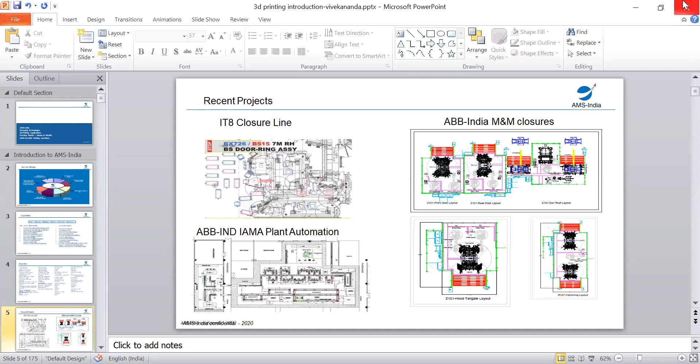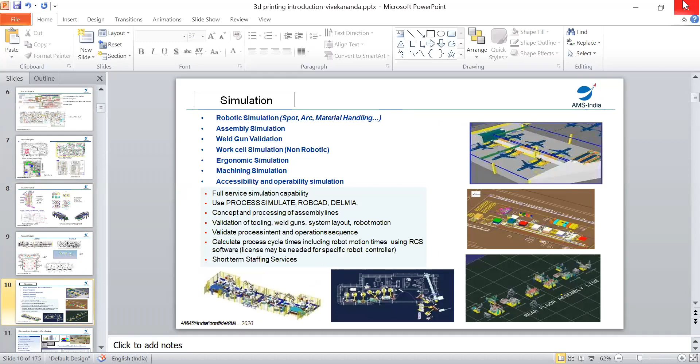I don't think these are all much relevant, but I'll move fast because I'd like to share more on 3D printing and applications of additive manufacturing. Some of the lines we design are for Renault, Daimler, Volkswagen, and almost all car manufacturers in the world. We also design the line, calling for making a whole process of how the line is made. We do a lot of robotic simulation, discrete event simulation, and check the whole line using simulation software. We ensure these factories will manufacture cars according to the cycle time and quality the customer expects, and only then does the actual manufacturing start.

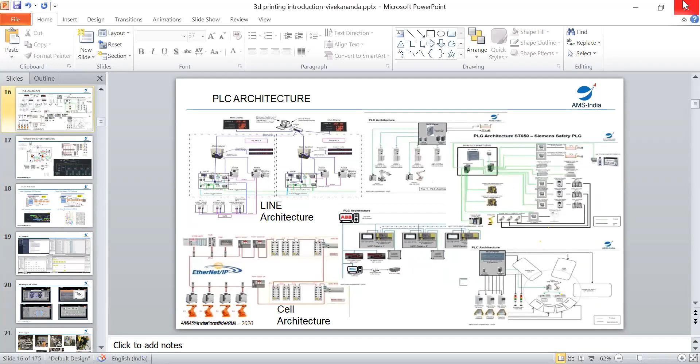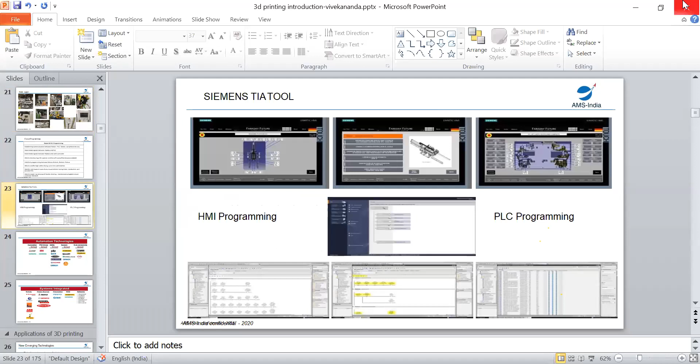These are some techniques by which we do it. We do controls engineering, design the PLC architectures, the complete line design, the cell architecture. We handle power distribution, safety zones, and how utilities are used in a factory. We design PLC programs for each station and do all the HMI screens for human machine interface, so the operators know how to work in the factory. We also give on-site support, do robot PLC programming, and use the complete Siemens TIA tool. We are primarily into automation technologies.

We work a lot with companies like Siemens, Mitsubishi, and Rockwell, doing automation, safety devices, sensors, I/O connectivity, etc. We integrate all these systems - different robots, PLCs, control systems, actuators, and sensors - all together in making a factory. This is what we have been doing for the last many decades.

But what happens normally in an industry of this kind is that business is not continuous throughout the year - it's a cyclic operation. There will not always be business; there are ups and downs. New cars don't keep coming always, it comes once in three years, so there's always a down period. And when there's a recession, the automotive segment gets very badly hit.

That is when we were struggling at one point in our organization to see what to do, and we started doing internal analysis to see how we could survive the recession. In 2010 we started thinking about new technologies, doing analysis on where we should go ahead and what should be the future direction of the company. We saw areas of robotics, smart manufacturing, artificial intelligence, IIoT, and 3D printing - these are emerging technologies. We went into more depth to find out why these technologies are coming up and why they would have a great impact in the future. We found that people want personalization - they want everything personal.

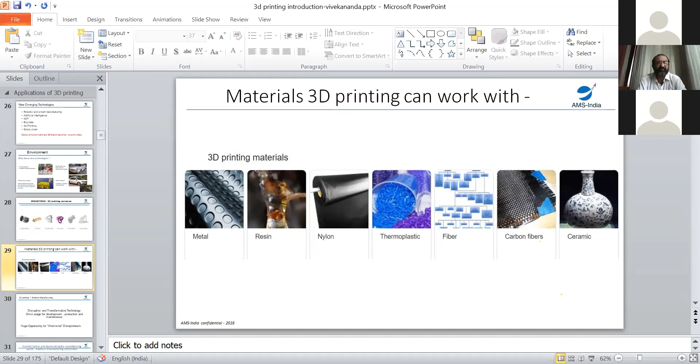So the same technology and the same machine was able to work with different materials, which was not commonly possible under conventional manufacturing technology. And that is why it became very disruptive in nature. It's a transformative technology, used for production and maintenance.

And this had a great opportunity for companies like ours, or any company for that matter, or anybody who wants to become an entrepreneur, to be in this domain, because this is going to be the future.

What we have also seen is this actually brought in a huge paradigm shift in thought process, where you can start designing without limits. We can start designing without thinking about circles and squares. Normally this is what we always have for manufacturing, because that's the conventional way, which calls for circles and squares—everything we normally tend to think like that.

But instead of doing subtractive manufacturing and removing metal out of a block, once you start thinking of adding it part by part, making a shape doesn't become difficult. So the more complicated the shape, the easier it is to 3D print than with subtractive manufacturing. So this actually gives a great advantage.

You can reduce the manufacturing time. You don't need tooling also. You can just directly start printing, just like how we do printing of any part for that matter.

For artists, however they want to think about it, complex geometry becomes an advantage. So traditional methods have to change, and this is what actually happened.

So what we also saw was, not only in traditional manufacturing, the whole methodology was: you have a 3D model, then you have 2D drawings, then you have dies, gauges, and then you start finishing the whole part. You make a whole line to produce these complicated parts. Then once we came to 3D printing technology, the whole thing started becoming different. You have a CAD model, you slice it, you directly 3D print it, and then take the part out and start finishing it. You don't need to think about dies, machinery, or the process of manufacturing. The whole thing is different.

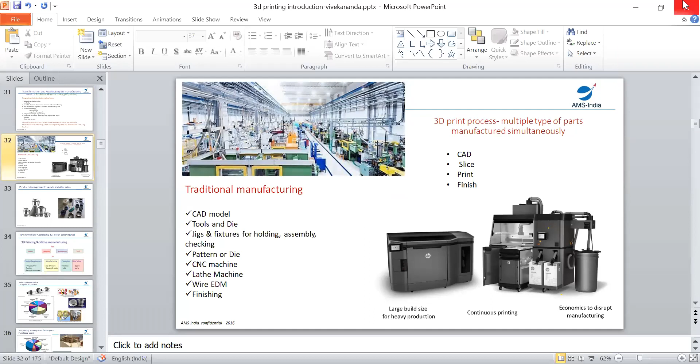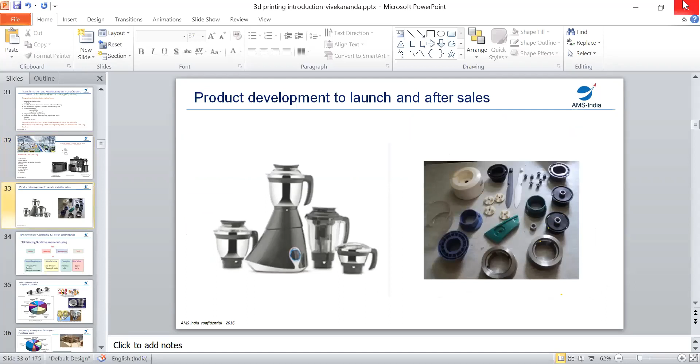This brings in a great advantage in the process of 3D printing itself, which brings a huge benefit for manufacturing technologies. For example, parts manufactured for launching and after-sales support can be directly printed. Every component you see on the screen is 3D printed. This makes a big benefit for us because there's a huge market available where things can be converted from conventional subtractive manufacturing towards additive manufacturing. This brings development time reductions, savings in product development, manufacturing costs, production, and prototyping. We save everywhere. Products can be launched much faster, and the process can be thought about much differently.

Till the product gets developed, one of the biggest challenges in the industry was to establish a good manufacturing process. But here we've found a way where we don't need to think about the process first. We first make the working product, useful to humankind, and then think about a process for manufacturing. This brought a huge transformation, a change in thinking itself.

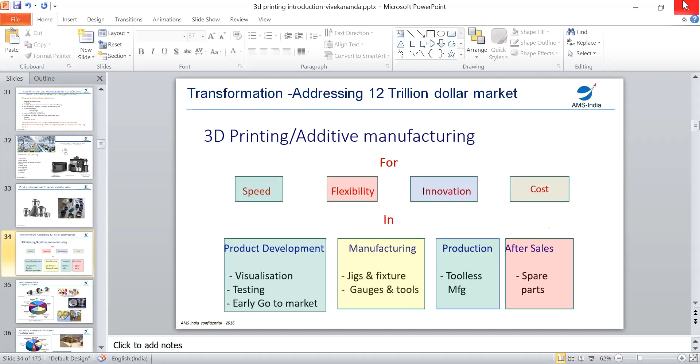And today, if you go into the market and see how these 3D printers have been used...

Hello? Hello? Hello? Hello? Sir, am I audible, sir? Hello? Yes sir, you are audible, sir. It was some participant. Okay, no issues, I'll continue. Sorry madam, I thought somebody interrupted. If you have any questions, you can ask me to stop. I have no problems.

So this is basically when we look at the complete industry-wise segments and where we're going to use 3D printing more, we realize 3D printing is maximum used today in aerospace technology. Of course, it is moving more towards industrial machines, consumer and medical industries, everywhere. But this is the area where it currently is, and we have to start bringing it down towards other areas.

For example, 3D printing technology, which was once mostly used for prototyping purposes, has been moving towards making functional parts. It was like making something just for a scaled-down model, or to show how a house looks before it is assembled. Today it is not so. They are making complicated component parts which can be used as functional parts, tested and tried out, and that is when it becomes the real benefit.

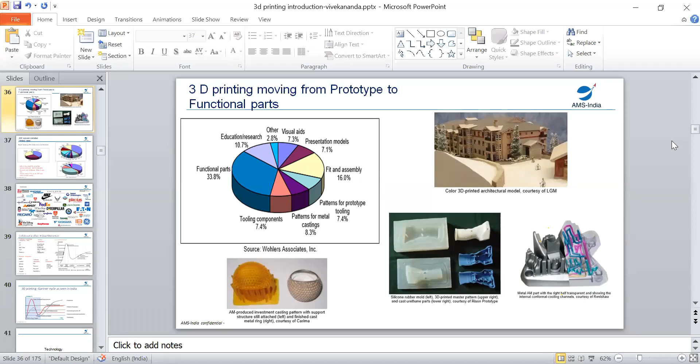Across the whole globe, when we look at Asia, the amount of 3D printing exposure we're having is just about 25-30% in the Asian domain. And within Asia, when you see where India is, we are just about 3.2% of how much 3D printing is being used. So India is less than 0.5% of the systems delivered for education or research where 3D printing can be used.

And it is changing. In fact, the technology has to go downwards today towards everybody, including school children should learn 3D printing, in my opinion.

It's not that, at one point of time, only PhDs were working, or maybe only high-tech people were working on 3D printing. Today, just a week back, we had a discussion with a diploma college from Chikbalapur who wanted to bring in 3D printing in the ITI domain.

ITI Cuttack is using 3D printing in that area. 10th standard students are beginning to use this technology, which is very much welcome, and that is how India is going to move further, and this is going to be the future of manufacturing or development itself.

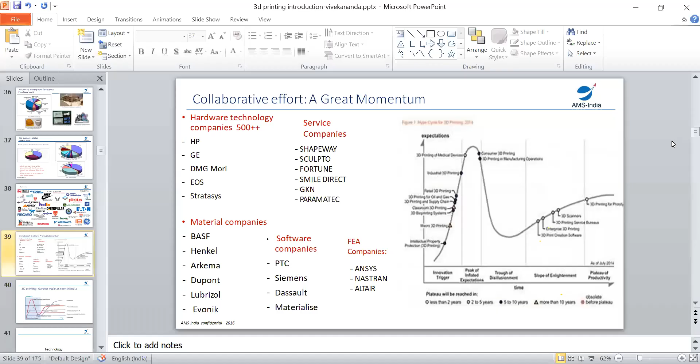We have been working with many customers, merging together. And as you can see today, the situation is that 3D printing has gone to a level where it has already moved away from just being a prototyping part to a rapid prototyping part.

Today, people are making functional prototypes, and I'm sure in the coming years, 3D printing is going to become a manufacturing process by itself. It can become a manufacturing line by itself.

In fact, one of the companies in the US where I had visited has more than 400 3D printers manufacturing components directly using 3D printing technology. So this is where things are going to be changing, and that's going to be happening in the future.

So the old way of throwing away scrap material, cutting away machine parts, and reducing through subtractive operations is going to, I think, vanish in the coming decades.

So when you talk of 3D printing, I presume that you all know about 3D printing, but just for the sake of continuing the whole thought process, I thought I'll just share with you how it happens.

When you see an object, for example, there is a cup. What you do is you take this object into a CAD model, you take it into 3D modeling, and then you cut it into slices. You cut it into thin slices of maybe 0.1 millimeters or 0.2 millimeters.

You all have seen when you take a 2D print on a sheet of paper, the same slice can be printed, and when you print it, you get a print of the shape of a cup in section, and then you start printing on top of the same thing again and again. You start building it in the third dimension. This is the normal way of 3D printing.

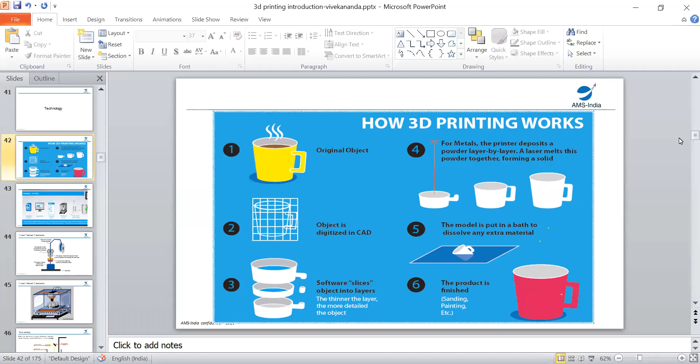And here you go, when you start making parts, there are different ways by which 3D printing can be done. You take a 3D model, you cut it into slices, and then you select the material that you want to print, use the 3D printing process, and then you do the whole operation and make the 3D component itself.

One of the first and oldest technologies that came up in the 3D printing segment is called fused filament fabrication. The type of machines which we build, this is something very specific towards where technology is gaining to a very great extent. It's a very low cost technology, but a very, very powerful technology.

Of course, the offshoot of this is basically from welding technology. You can see welding was done for ages, where you have a filament, where you have a wire coming out, which is melted because of the current itself. The high current is given there, which melts the metal, and then you're going to pour it and use it for joining purposes.

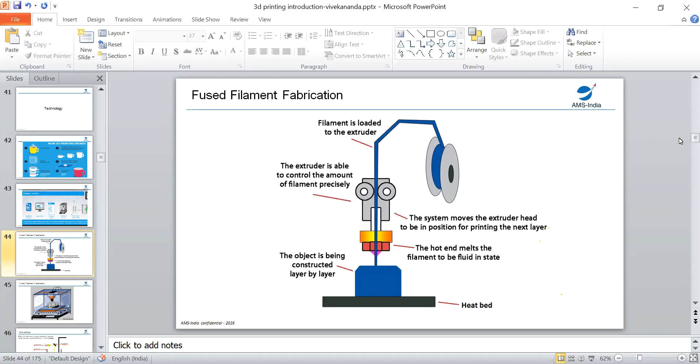Now the same technology is being used, where you're going to get a filament or a plastic filament passing through a nozzle which is heated, it melts, and this fluid which is coming out of the nozzle is being put on in a layer by layer fashion to get a 3D model. So this is fused filament fabrication.

This is one great technology which has actually changed, or rather made a huge impact towards a lot of development that has happened in the manufacturing segment itself.

The second technology that has come up is called SLA, which is actually stereo lithography apparatus, wherein you have laser as a source, and this laser is being exposed. The resin is used here.

The resin is exposed to a laser source, and once the material is exposed to the laser source, it immediately solidifies, and once the material solidifies, then you see that it becomes solid.

So then the bed goes down, so the new resin is covering up the old resin, and then you expose it again to the laser, and again it solidifies and sticks onto the previous layer where it has already solidified before. So this cycle of solidifying and refilling is the process which is used over here to print resins.

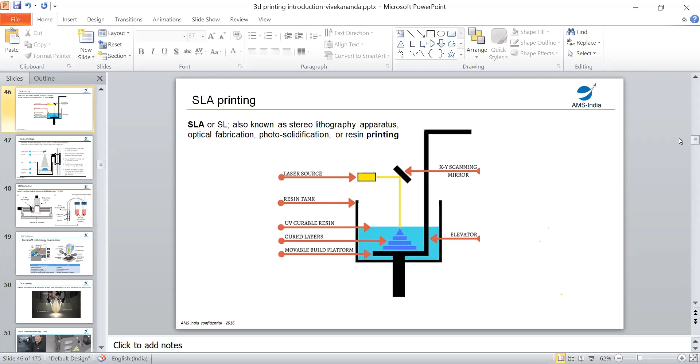Next, you have different ways. Not only do you use a laser as a source, but you also use direct film itself. So you can use a laser source and make a whole picture to be thrown in one shot at different intensities, just like a TV, where you get different layers and different colors coming up, and that's how you can start printing even color objects in resins.

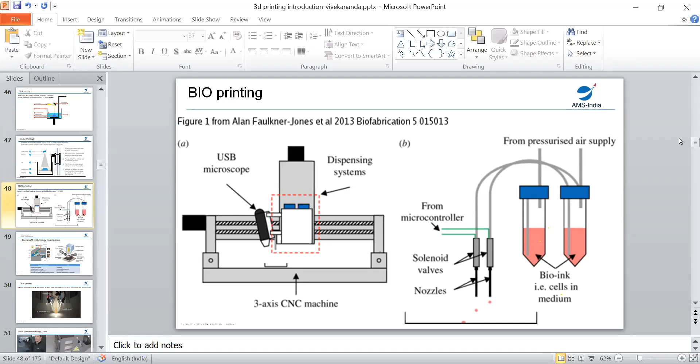And then the next technology came up for bioprinting. We also make bioprinters. So here is a technology which you use for bioprinting. I'll talk about bioprinting later, but this is another method which is very much used today in the biological industry, for bio research or bio parts manufacturing.

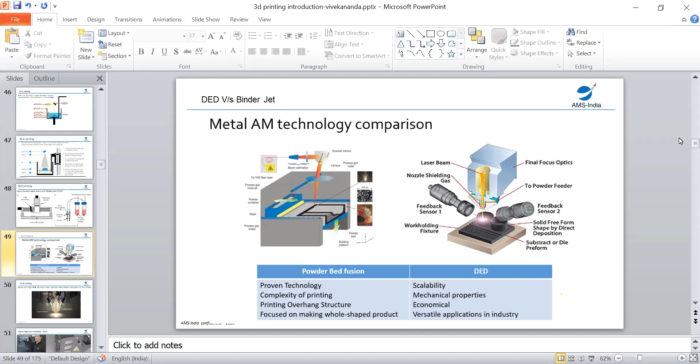The other technology which has come up basically is direct energy deposition or binder jet. This is purely a technology by which heat or different sources are used basically just to solidify metal powders. You have a metal powder, use a laser or an electron beam or some source which is going to heat it and melt it, and just like we use resin for making SLS parts, SLA parts, here you use metal powders, you solidify them and do it by additive manufacturing.

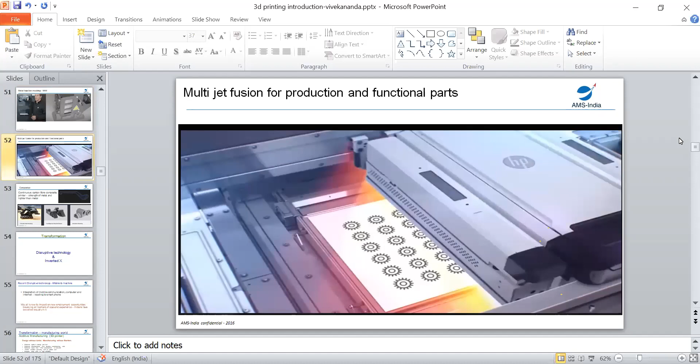This is another technology, SLM, where you have selective laser melting. So here you have a laser source, you have the powders coming, the powders are melted and deposited layer by layer again. Different technologies have come up: metal injection molding, metal multi-jet fusion technologies. HP has come up with this multi-jet fusion, where you can print multiple parts together and make different things.

Then composites have come to be very greatly used. This technology is used greatly in making composite materials, especially when you want to mix two different materials and print them together. For example, you want to make a brake lever or any component for that matter, you can use carbon, which is very hard, and then you can use plastics, which can hold the carbon fibers together, and together a mix of carbon and plastics makes it a very hard component. It can become as hard as aluminium actually. So we have machines where you just use carbon fiber and plastic together to give you very hard components.

So now, getting to know what technologies are there and how exactly it is changing the world, we have to move ahead and see the great advantages of 3D printing. Number one, just to recapitulate what I've been telling till now: design without limits. You can make any design, any shape. Reduced cycle, so you can reduce the cycle to design, test and manufacture the product. Product launch is very fast with this technology. And you can make different components of your shape, size and choice, and development becomes very easy.

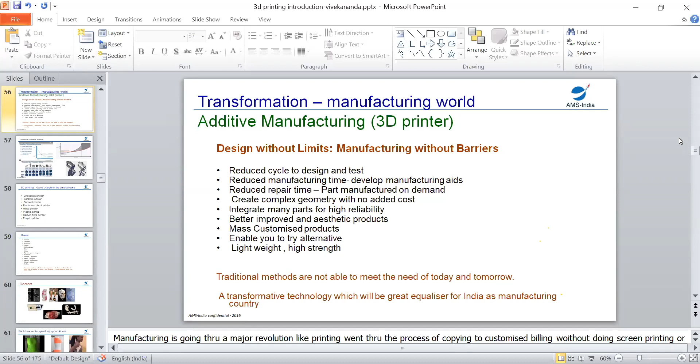It's just the idea which is required. Before, it was not the idea which was called for. You could come with good ideas, but they would have been turned down because they were not manufacturable. But today it is not like that. You have a good idea, you can get the product out. So it is the idea which is called for, where you can become more innovative in thinking and bring up better and better products by way of 3D printing.

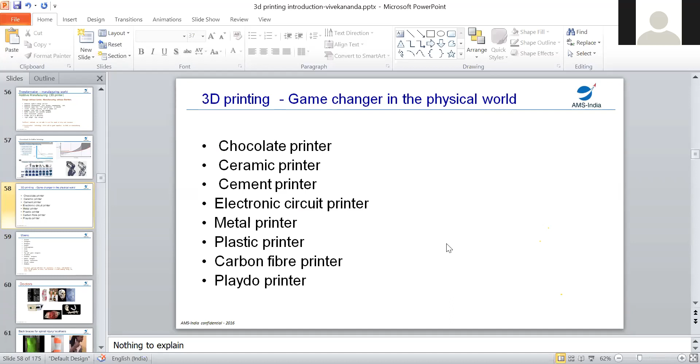That's the benefit of conventional versus additive technology. And 3D printers have been used in a variety of areas and domains. The same 3D printing machine which is used for one particular application can be used today for many things. You can see, right from chocolate printing to ceramics, cements, electronics, circuits, metals, plastics, everything is printed on the same printer. This is the thing.

We needed 100 machines to work with different materials in the conventional case. Here, everything comes together. There were days when machining meant it had to be a mechanical industry. It had to go to a factory where they have all the machinery and trained operators to use the machinery. Today, 3D printing is being used by a variety of people. Doctors have greatly benefited. Designers, sculptors, anybody can use it. It becomes a very easy tool for all people to use.

Doctors can start using a 3D printer on their own to print different components of the skull or bones or orthopedic parts, for example, and even teeth can be directly 3D printed. Today, this technology is used to a very great extent, even for supporting lumbar pains and supporting structures. Exoskeletons are being printed using 3D printing. Braces, for example, this is one big application which has really helped.

As you all know, the shape and size of every human being is different. And today, if you see, these particular braces are not standardized for every person. But here, 3D printing helps us make removable braces, which are customized for every person's shape and size, where personalization is great. And this really helps to a very great extent in the medical industry.

Similarly, prostheses, for amputees where legs are not there. These are all 3D printed. So you can scan the leg. Once you scan the shape of the leg, the parts can be printed exactly to suit that particular shape. And this is the biggest benefit. And these are all, I can say, at a rudimentary stage of development. And now technology is slowly coming up in this area.

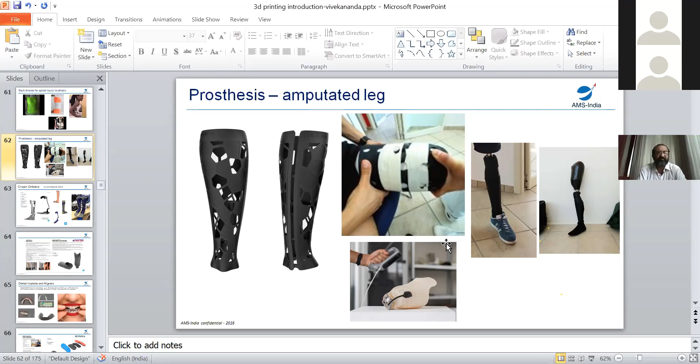And the people, students and youngsters of the future should get into these areas and come up with unique ways of designing components and making parts. This technology makes it very easy to realize their dreams, which was very difficult before. For example, there are companies which have started making components for leg support itself. People have an ankle twist, or people have one leg a little short and one long. Many applications, many uses are there using 3D printing.

And dental implants. Yes, I'm just showing you examples of medical. I'm going to show you more. Dental implants, you all must be aware how beneficial they have been today in the industry. And this has totally changed the way dental care is done.

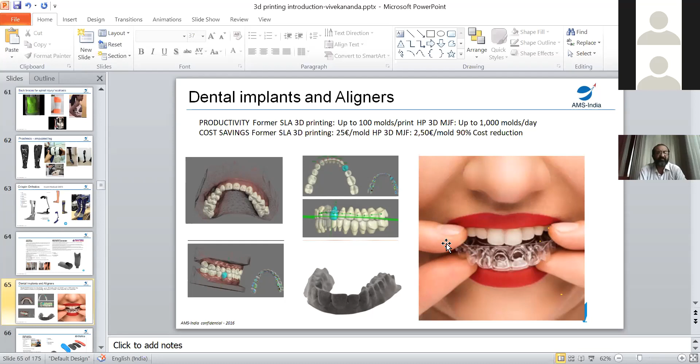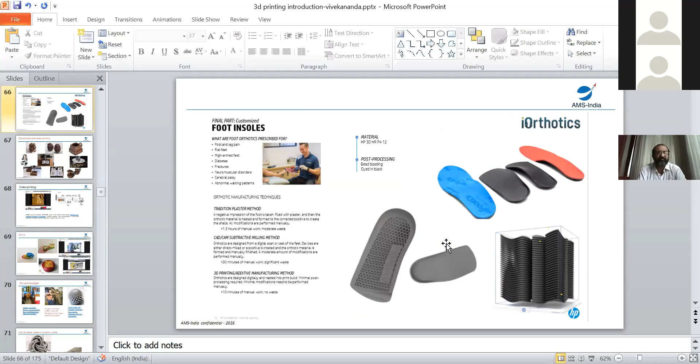And in fact, today people who are getting backaches have been using different soles for their legs. And these soles are 3D printed because the thickness has to change depending on the person; the difference between the length of their legs has to be compensated using the sole. And that is where it is being used to a very great extent. The leg aches and back aches are going.

Not to mention chocolates, of course, personalization. Everybody loves to see chocolates of different shapes and kinds. And so one can print it. Even today, houses can start printing chocolates of their own kind. They can design and do it however they want. So that's the biggest benefit of 3D printing.

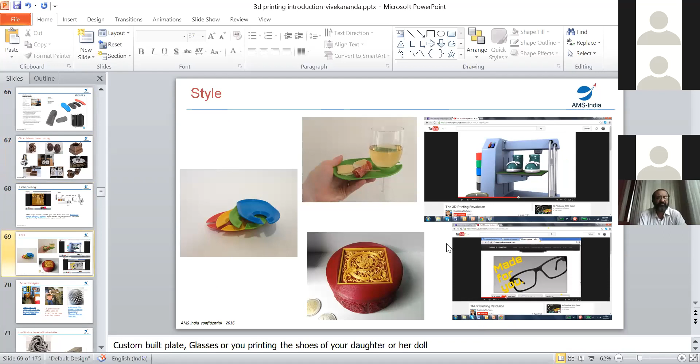Cake printing again, those technologies are there. Same machine, it's just utilized in a different way. And there's a huge opportunity for people to come up with new ways of printing and manufacturing all these things. Different style components. You can see sculptures, idols, for example.

And today we have been working with some people from Mysore. Actually, they are making sculptures, all these idols required for gods. They are printing it. So this is where things are moving. Once upon a time they used to have a sculptor going and making all those beautiful sculptures. Today it is all 3D printed.

And not only in plastic, it's all 3D printed in metal, in ceramics, in many different materials which I have shown before. You can see some of these things are 3D printed, very complicated or very unique architectural shapes. Architecture students themselves can start thinking about shapes.

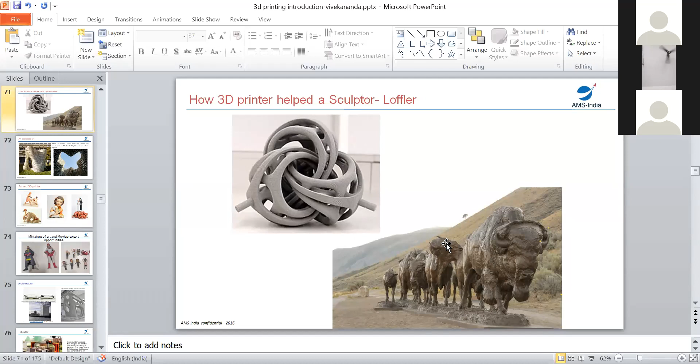And today when they want to build, many times we see architectural students who travel across from here to different places to look at old temples and those structural places. But today we are not seeing architectural beauties coming up in countries. I can see only buildings coming up, but there are some things like that where architects can really work and use 3D printing to make beautiful structures and beautiful shapes, which becomes very unique and very easy to manufacture.

3D printing and art and making dolls, for example, is a huge business area itself which is available. And with 3D printing, you can use very compatible material. You can use materials which can be reused again and again. You can make it out of ceramics, you can make it out of porcelain. All these materials can be printed in 3D printing, and using resins and different things, different types of toys. This itself is a very huge market by itself.

I'm just talking about opportunities where we can start thinking and making and coming up, where the future of students who can think about different ways by which they can develop these technologies, use this technology to make beautiful products.

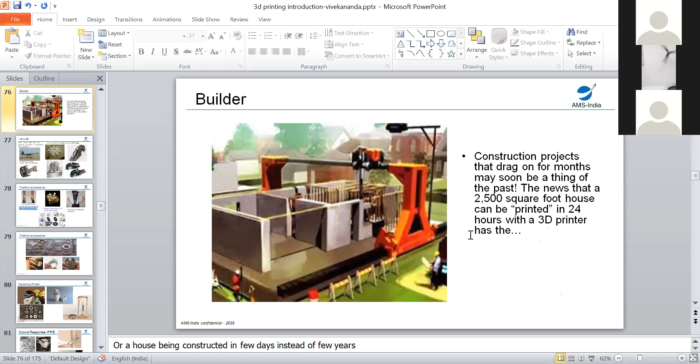We're working with a company called Delta Wasp, and this is a company in Italy actually, and they have a unique way of making houses. It's come up with where you can start 3D printing houses also. They construct a scaffold or 3D printing machinery, and they start building houses in 3D printing. It will not be late before you can see this technology being used even in countries where population is high. Definitely housing is a big question mark, and so this will be a technology where it can be printed very easily.

Aircraft components, nothing to mention. This has always been there. The first place where 3D printing was very successful was this area, and the aerospace industry actually helped us develop and move more in this particular technology.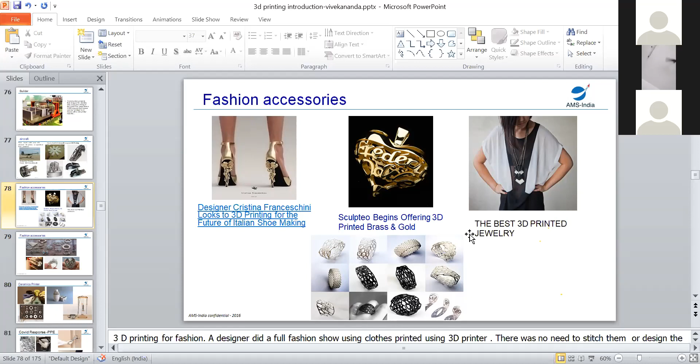Fashion, this is also a very personalized area. When people want fashion, people can come up with new products. One can start a business overnight and have one 3D printer, and they can start making designs, and they can start selling it in Amazon and things like that. There are many people who are actually doing this area of business also. Different jewelries and different fashion accessories. And here there is no limit of thinking. The innovativeness and creativity of all the engineering people and all the science people today can be very great.

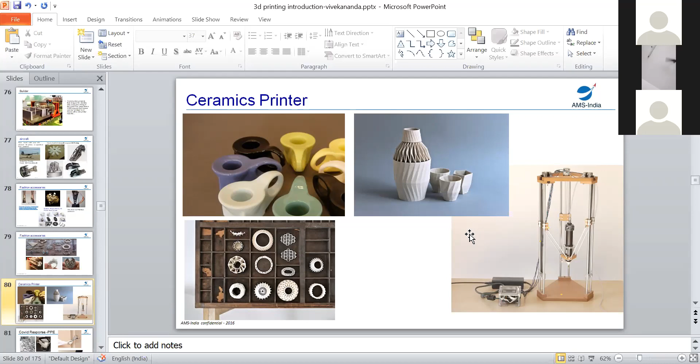Ceramics, we can again use ceramics for printing. The printer we manufacture can actually be used for printing different types of ceramics. In fact, one of the biggest things today is different shapes of components in China. If you go and see, even those chopsticks they use today, they're using 3D printing in the houses itself. They use and throw chopsticks, and so there is a huge benefit.

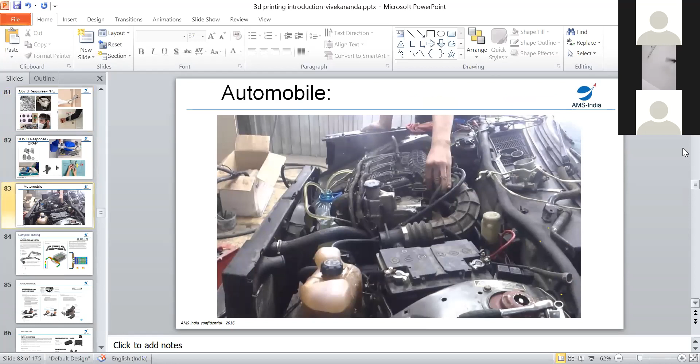And the automobile, nothing to mention. The new products which are coming, the new cars that are going to be made, everything, they are looking at 3D printing, and developmental time, which was originally 3 years, today they're crashing down to maybe less than a year to come out with a new car because of 3D printing technology.

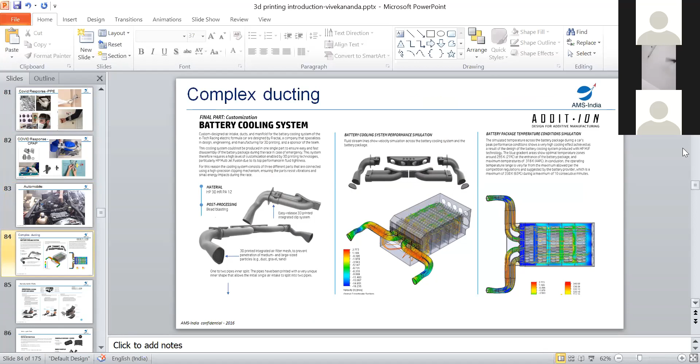Complex ducting, for example, if you want to have different shapes, just imagine the time it calls for actually making these ducts and making shapes of these ducts, which are very unique and which have to have all the aerodynamic properties built into them to give you the cooling of the whole engine. This is all done by 3D printing and testing. And different components of the whole vehicle can be aerodynamically designed. Motorcycle components, for example, manifolds, engine covers, all these are 3D printed.

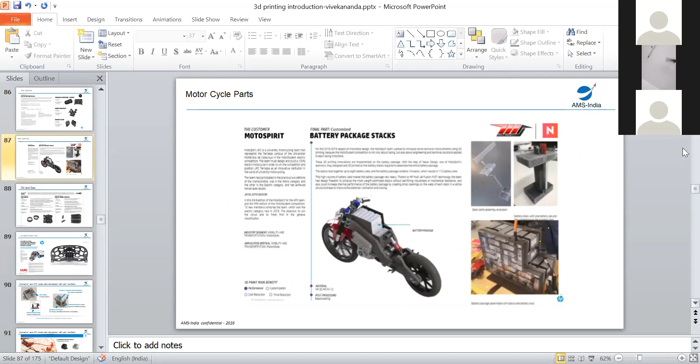Today, with the new electric vehicle concept coming up, people will come up with ways to make their own vehicles using kits and 3D printed components. This is going to come in the near future, and this is one area where you will find it very beneficial. This technology is also used for sure in oil and gas, for filters and things like that.

Assembly automation is another area. When you want to make assembly tools in the prototyping or initial stages, making a tool itself is a big challenge, and it can take months. Here you can actually make tools which can be assembled or 3D printed directly and used.

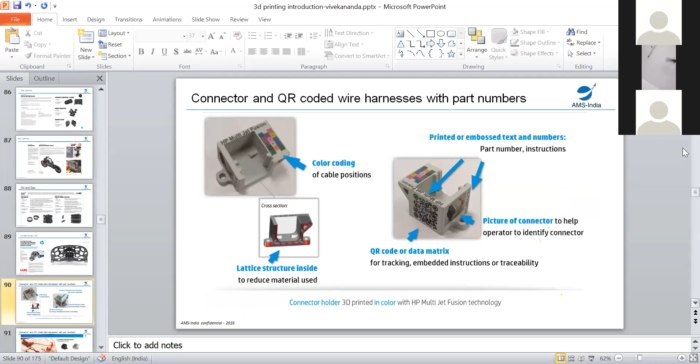For example, QR code connectors, or electrical connectors, can again be made unique, special, or for testing. Today, the number of pins you want in a connector is dictated by certain companies, so only that many connectors and pins are available. But there are many applications which may call for different types of connectors, which we can 3D print and make directly. Some of these connectors have been developed by 3D printing itself.

Also headlights, because it's plastic, in automobiles. We've been working with a company called Minda, for whom we are making these headlight lamps, etc.

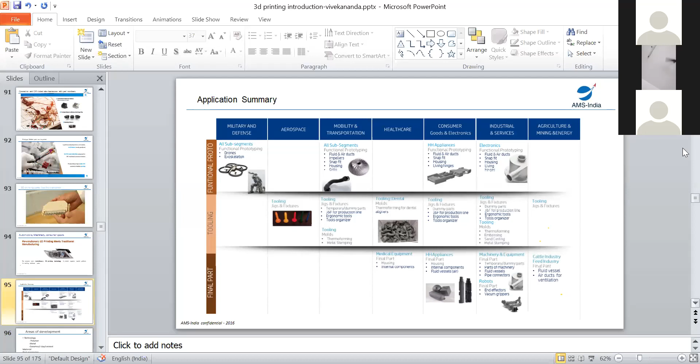If you try to bring in all the applications I just showed and put them in a table, you can see the maximum use of this technology is in industrial services, consumer electronics, and mobility/transportation. There are still many domains where it is not being used. Mostly it's in consumer electronics and industrial services, especially spares and maintenance, where 3D printing has been used, but it can be used much earlier than that too.

There are a lot of areas where development is required, and research is being done today in metal component making, ceramics, cements, etc. So it is going to change quite a lot.

Design optimization is one area where thinking will change. There's something called DFAM, design for additive manufacturing. A normal way of thinking is that regular product design calls for making components which are easy to manufacture, but with DFAM, one starts thinking for additive manufacturing instead.

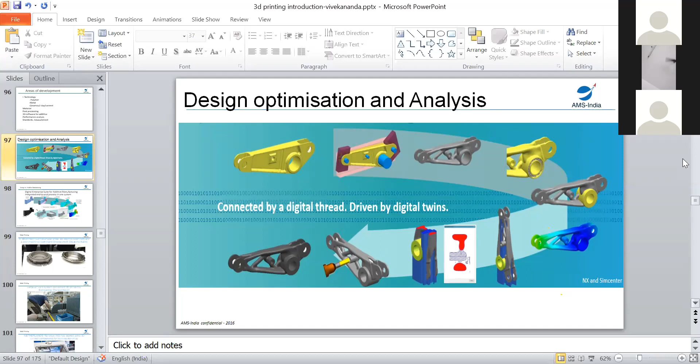There are ways by which design has to change. You can see a conventional or common part which has been designed, and how it starts getting transformed into a 3D printed component. This is design for additive manufacturing, and there are many software tools today that allow for this.

A simple air conditioning duct, for example, can be thought about differently: how you lightweight it, how you optimize the topology, how you run an FEM analysis to make sure it still has the same strength, and then print it to get the final component after 3D printing, instead of fabricating it through other methodologies.

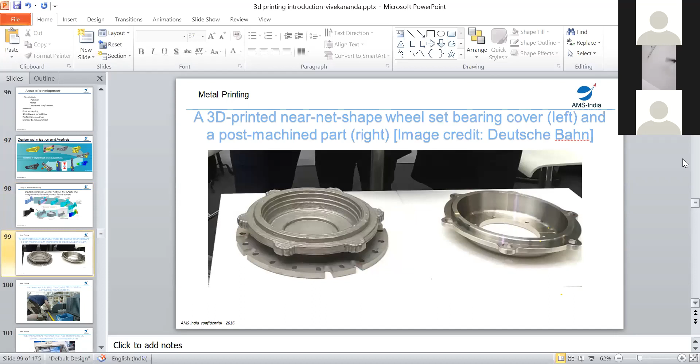This is metal printing of components. You can see some of these components which were used, where we can directly print the component instead of making a casting or doing all those other processes. 3D printing metal components itself has been of great benefit.

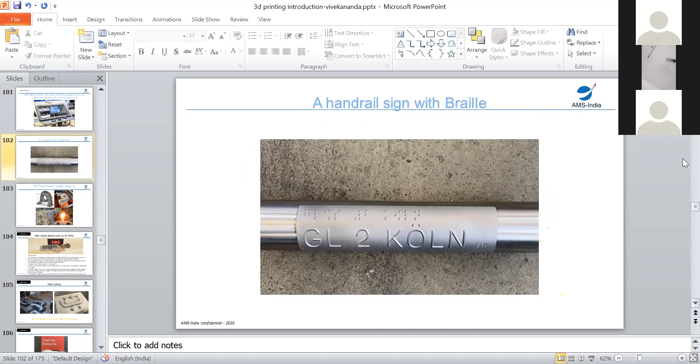Some unique areas where this is really going to be used, like making valves, etc. One thing that really came to notice is this particular item: it's a handrail for braille. Imagine in every railway station you see a handle, but blind people cannot see it. I took a picture of this. Here is something you can 3D print and stick on top of the handle, so a person touching it will know where this train is going, or where this road leads. This is a benefit which was not normally possible, but is now possible with 3D printed components.

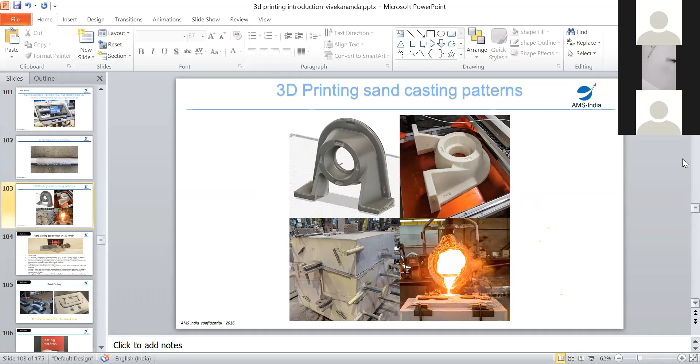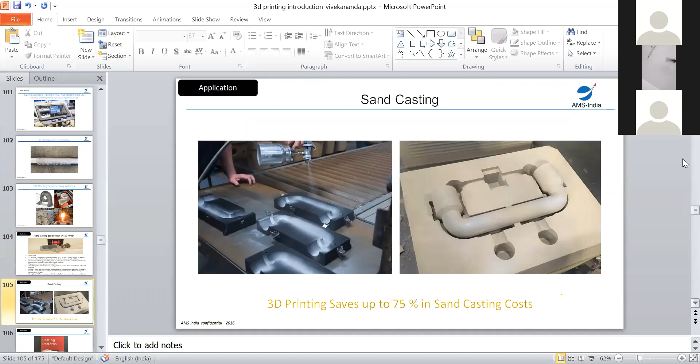Making patterns, making directly ceramic molds where casting can be done directly. Molds itself can be printed today with different types of sands and casting sand, for example, or that POP. You can directly use POP also for printing. Some of these examples or shapes have been printed and actually done by 3D printing, and we'll be able to use it in industries for the foundry basically.

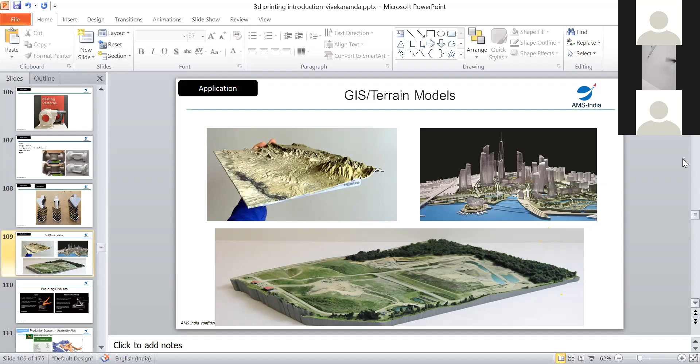Some of the GIS or terrain models - you can see today this is being used even by the Indian Army or many armies across the world to get directly the shapes and the GIS or terrain models itself. They take the print because they want to really pinpoint the GPS coordinates and see how the terrain is to make overall planning. I think 3D printing can give a very good visual print of that, and it's very fast and low cost actually.

Other thing is to make fixtures. You want to make 3D printed fixtures for clamping or want to do some welding operations - immediately you can start 3D printing a fixture itself and start keeping metal components for welding. Or then you want to use it for assembly components - you want to assemble a whole fixture. You can use a 3D printed fixture for assembling on top of different pipes that need to be assembled.

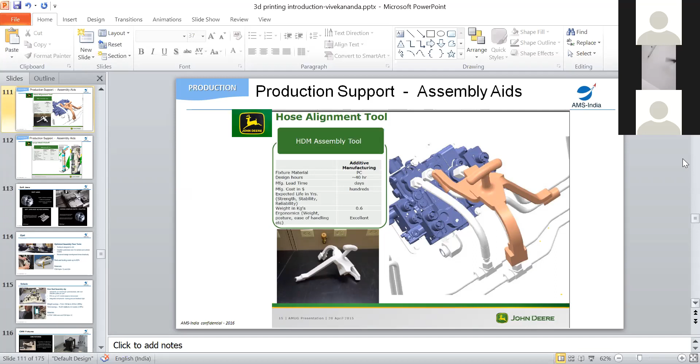For example, what is shown here, the brown color one is the fixture. It gives the orientation and the shape of the pipe. It can be used like an assembly fixture for alignment purposes. Conventional process makes it very difficult. With 3D printing you can build different lightweight tooling itself. These are some of the companies with whom we have worked and where we have developed these fixtures, and we have given them either machines or developed technologies or given them different types of solutions where complicated ways of working have become very simple.

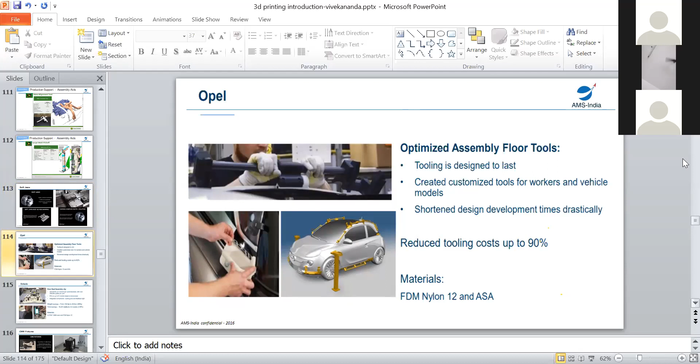Some of the soft jaws, again 3D printed, for boring jobs. Companies even in the automotive sector, like Opel, have worked together with us to make components, to do the checking fixtures or to do some fit and check the fitting and everything. Directly you can print tooling, and that can be used for assembling and checking the components.

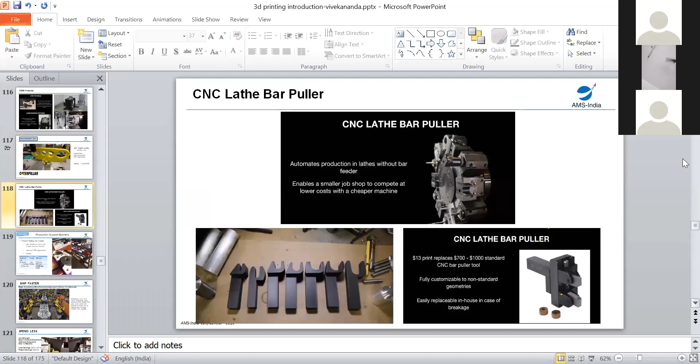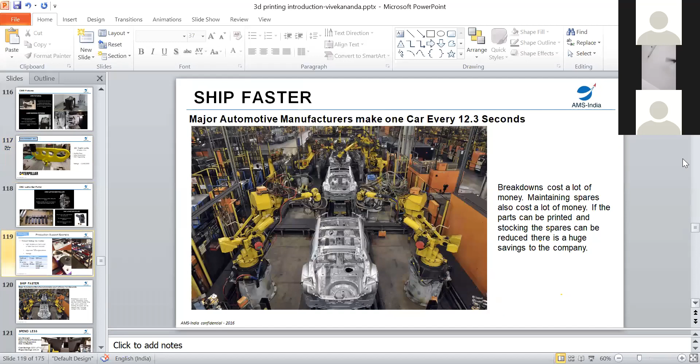Similarly used for different components on the lathe. When you want to see different tools that you want to hold on a lathe, different types of tool holders and tool jigs can be directly 3D printed. Again, production support tooling, thread rolling, and things like that. Effectively, shipping becomes fast, you have to spend less, and you get a very great benefit of doing all these things. These are the different applications that I thought I should share with you, giving you an idea about all the types of areas and domains where this process can be used, where people can start thinking about new technologies and come up with solutions.

Now I would like to share a little bit of information about the machines that we manufacture. Basically, we manufacture 4 types of machines: industrial research machine, laboratory research machine, biological research machine, and budget research machine. All these machines have a common thread - they have a common yoke system, where you can have hot flow heads, cold flow heads, and warm flow heads get attached to the same machine, which I will talk to you a little bit more about in the next coming slides.

What this basically means is that these attachments will be able to help you do different operations. There are many accessories to the machines. I'll tell you what accessories we have, the materials with which we can print, and I'll also talk a little bit about waste to wealth, how we can connect and maintain, and things like that.

We have a factory in Pune actually, about 2,500 square foot, where we actually make these machines. We also work with many government institutions, and we supply machines for research-based institutions across the globe - not only in India, we've also been supplying machines elsewhere. We have a factory in the US also, in Atlanta actually, and we also make machines and supply them from there.

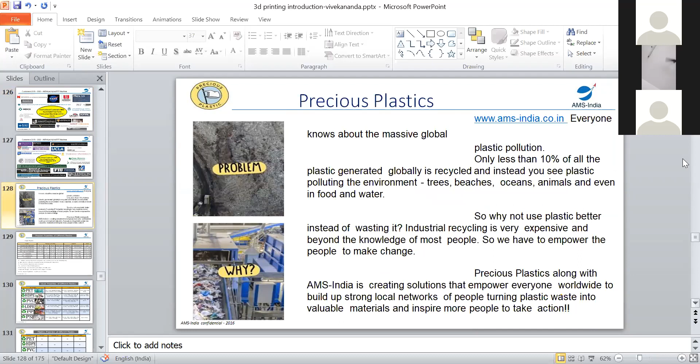Basically, one concept we want to show you before I go into the depth of 3D printing machines per se is about precious plastics. Precious plastics is a unique concept which we came across because we all know plastics is a big problem. One technology we wanted to promote as an industry partner to the education industry and to the consumer industry is bringing up a new concept by which we should be able to handle all household plastic in community-based living.

There are basically 6 different types of categories of household plastics being used. Everybody can do this business. They can do it part-time, within their houses, however they think they can do it, but fundamentally they just need to understand this concept of precious plastics.

These components which we get, we have categorized, and whatever you buy comes under these categories: either PET, HDPE, PVC, LDPE, PP or PS. So how do we identify what material this is?

If you just light it, there are different ways. You can check it by burning a little bit. The different colors will show what type of material it is made of, what organic material it is made up of.

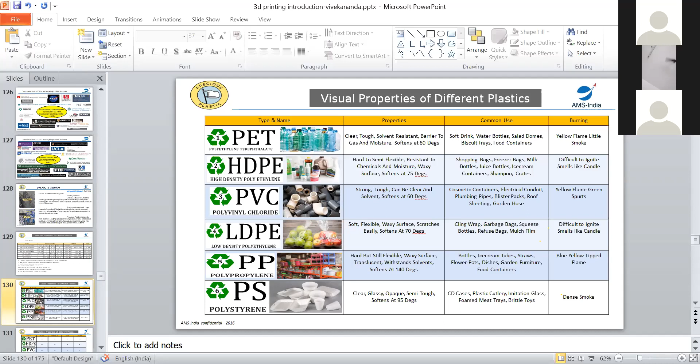These are all household plastics I'm talking about, not engineering plastics used in industries. We have different ways to identify them too. Put small pieces in alcohol - it doesn't sink. Some will sink in oil and water. So by flotation, by floating properties, you can identify these parts.

Then we built some very simple low-cost machines. This is not our prime business, but has been one of the areas to promote students, household people, communities, bakeries near the house, or apartment-based living people - to promote some sort of corporate social initiative where you build these machines and give them at very low cost for people to conserve or recycle plastic.

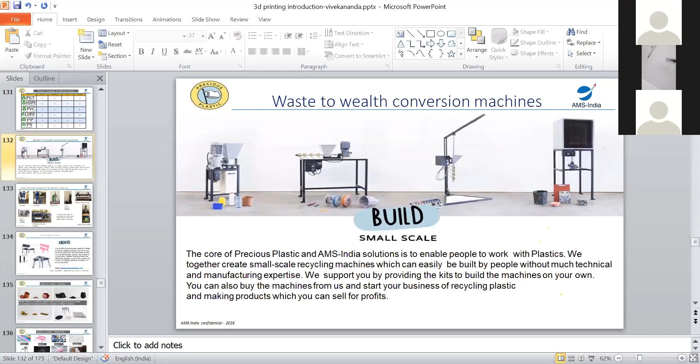That's the whole idea - waste to wealth conversion. We have a very simple thing called a shredder. You put plastic into that, it becomes powder. So first we identify the plastic, we know what type of plastic we have.

Suppose there are 10 houses in an apartment. Everybody starts giving their waste, segregated and kept in their houses. They can use a common shredder to powder it, and people are there to buy the powder itself. If you have a bottle or plastic, you have to pay money to recycle it. But if you convert it to powder, people will pay money and buy that powder from you, and you get revenue out of it.

Today, bakeries are keeping our machines, and where people go drink juices, they throw it there, and the same bottle is recycled or shredded, and that shredded powder is used for many other things. Like we make sheet press, we make an extruder where you can make different components extrude out of it. The powder is then put into an extruder, and you get extruded components.

The same powder is put into a sheet press, and you make tiles out of it, which can be used in compounds, which can be used on top of houses, especially when you want to make sure the houses don't leak - for waterproofing. Use a sheet press, take the same plastic powders, and then you can convert it to useful parts.

We have different hand injection molding machines for very small colleges, schools, and household people who can start using it. Dies are shared between people to make components - making phone covers or anything required for their houses can be made directly within their own communities and used.

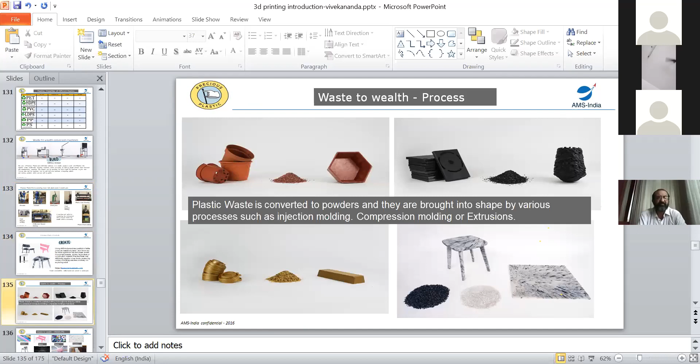This is basically ways to convert machines where you can create different components, like chairs, bars, or other parts. I'm showing you different types of components which are used, like bricks or carabiners for putting your ID cards, phone cases, dome closers, tiles.

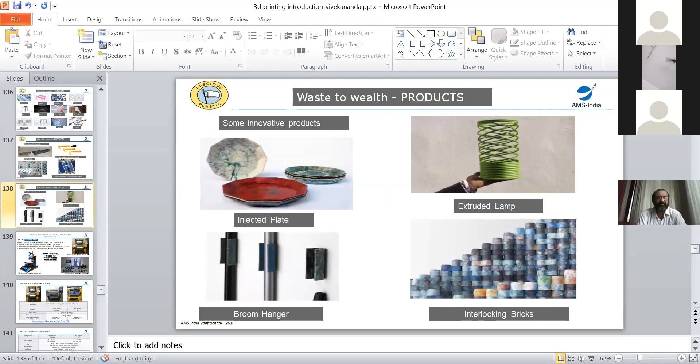Many things are being made using precious plastics, from waste to wealth concept, made from household plastics. One important thing people have seen is that broomstick holders are also made today from recycled plastic. These are all very useful things. You can see there are different types of injection molded plates made from recycled plastic, which can be reused, scrapped, or extruded. So this is the concept of precious plastics.

I thought I'd share it with you. Some young graduates coming out of college want to start an entrepreneurship, or at a home level they want to start some parallel business. Household family members want to start something. Instead of wasting all these things, they can conserve it. Very low cost, there's hardly any investment, and as a community they can join together and do it.

Now I'd like to bring your attention to the type of machines that we manufacture. If you really like to know more about the machine, please go to our website, hyrel3d.net - www.hyrel3d.net. It gives you a lot of information. I'll talk a little bit more about it.

Our machines are capable of making different components, for industry level, for laboratory level, and a biological printer is also what we make. For industry level, the machine is slightly big in nature. The machine is pretty accurate and comes in 2-3 different sizes, coming in 600 by 400 by 500 as the Z-axis height.

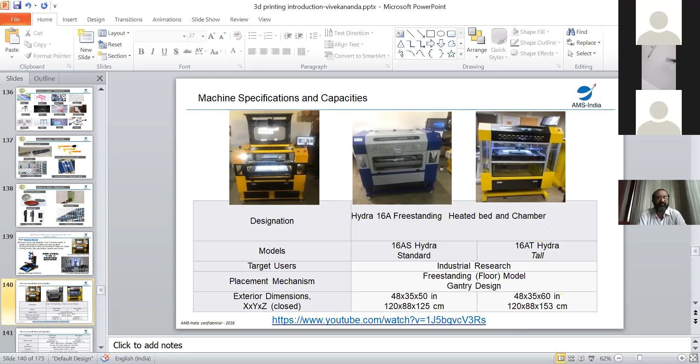That is the total build volume that you can do - 600 by 400 by 500, that is the total size that can be printed. Pretty big components can be done. There are a lot of attachments, a lot of what you call add-ons, accessories, which this machine can take.

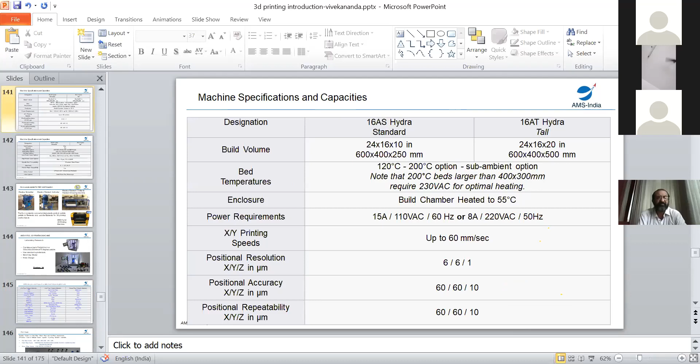Apart from just doing 3D printing, it can have different attachments for printing plastics, an attachment for printing ceramics, an attachment for printing resins, attachments for printing metals. Different attachments are there by which you can use the same machine for printing different types of components.

Apart from that, we also have a laser attachment on the machine. It can be used for laser operation. Suppose you want to do laser cutting of foam, or laser cutting, or you want to cut thermocol. All that can be done - paper can be cut, leather can be cut on these machines. And this is the benefit.

We also have a spindle tool where you can do some simple operations such as drilling, tapping, milling, etc. Where if everything cannot be done by additive manufacturing, some simple operations can be done by subtractive, for which you also have a spindle tool attachment. And all these options are on the same machine.

So this is the whole concept I've given for all the R&D or education system - a zero waste system. As you can see, the same shredder I spoke to you about before in precious plastics, and the same plastics filament, we have adapted it towards making filaments.

Today, powders are - if you pay 70 rupees, you will get 1 kg of powder. For 1 kg of filament, you have to pay 1,200 rupees. That is the cost of the filament. So if some college wants to buy a 3D printer, we supply them the 3D printer, we supply them the filament extruder, and we supply the plastic shredder also. So it becomes a zero waste system.

When the children start learning 3D printing, they have to print, and all the plastic components which get created can be shredded, can again be converted into a filament, and again they can start 3D printing. So this whole cycle goes on and on. So the investment becomes very, very less - this is the biggest benefit. So the zero waste system for R&D and education segment is what we have built.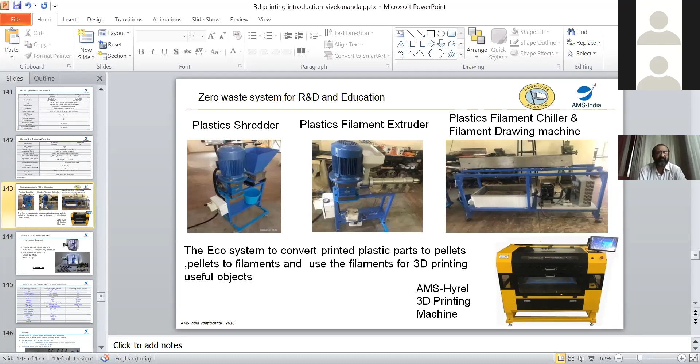We create a center of excellence, like a lab, where they use a 3D printer, shredder, and plastic filament extruder, and the children can learn all the technologies of printing once the system is in place. The smaller machine is for laboratory research, a knee type design. The other one was a gantry type.

The materials that can be printed on our 3D printer, using the extruder I mentioned, the hot flow extruder, include everything from ABS, which is normal plastic, to engineering plastics like nylon and PETG, and also polycarbonates. The highest temperature melting plastic available today is PEEK, and our machines can extrude even PEEK.

That means it will melt and print PEEK. PEEK melts at 415 degrees centigrade, so the nozzle temperature should go up to that, and printing should be very properly optimized for PEEK. PEEK is important because it's a biocompatible material, a very good engineering plastic used in aerospace technology, and primarily in the medical industry. Today PEEK is used for making bone parts that are put inside the body. You can leave it in the body, it's not poisonous at all, so that is the best.

Before, they used to put a titanium rod when there's a fracture. Today they're trying to print out of PEEK, which can be scanned and printed exactly the way they want.

Similarly, cold flow extruders are used for printing different types of clays, porcelains, plasticines, precious metal clays, resins, and silicones. In the medical industry, silicone is used quite a lot for implants. Silicones can be printed, rubber, sugru can be used. All these are printed in the cold flow extruder.

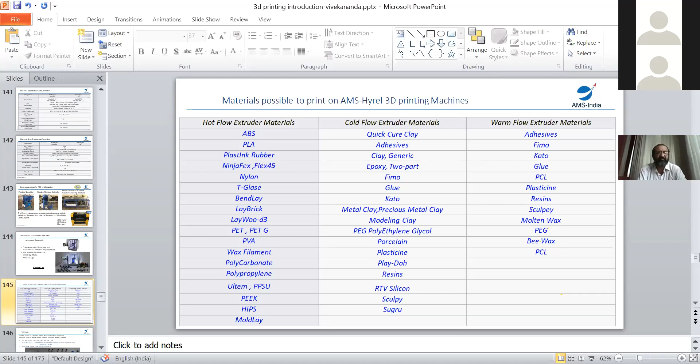We have developed more than 60 different types of extruders for different types of materials and applications. Just to give you a snapshot, here is an extruder that goes across all the machines we build. This one can go up to 250 degrees centigrade: the filament goes in, it melts, and this is the extruder you use for printing.

The next one goes up to 450 degrees centigrade, used for printing PEEK. The third one uses soft materials like Ninja Flex or wax filament, which require two motors. This is the MK250, which prints up to 250 degrees centigrade.

We have other types of extruders too, in three categories: one made of aluminum, one of plastic, and one of stainless steel. These plastic extruders are for filling in liquids, gels, epoxies, or any cold-form material. You put it into the extruder, then put it on the machine and start printing.

Then there's UV cure: when you expose it to the UV light that comes from below, it immediately solidifies through photopolymerization, which helps make the components solid right away.

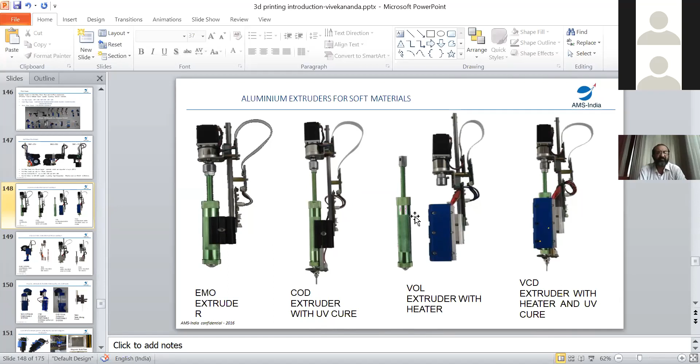You also get it with a heated jacket, so you fill up the liquid inside and heat it. Wax can be filled inside, heated to convert to liquid, and then exposed for printing. This is an attachment for the machine with an aluminum extruder for cold flow and warm flow.

Similarly, instead of aluminum, we also have a stainless steel extruder for food grade printing and ceramics printing, where you require a lot of torque. These are the types of components printed using this ceramic extruder. It comes with UV curing and a heating attachment, plus an extra torque motor. Made of pure stainless steel, it can be used if you want to make chocolates or any other type of item.

And then you have plastic syringes. These are syringes which are normally used for injection purposes in the medical industry. The same disposable syringe is used here, where you can fill it up with different liquids, like Vaseline-like liquids. If you want to use biogels, all that can be used for printing out here.

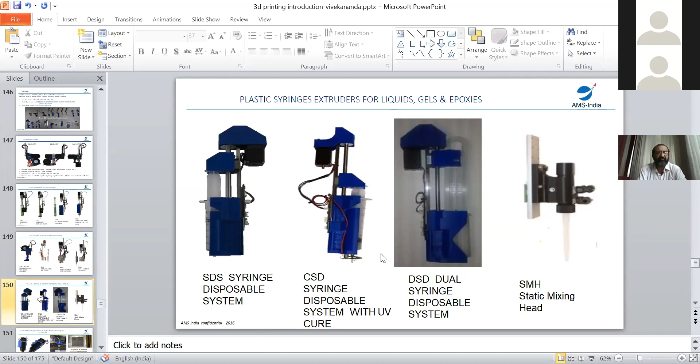This is called a syringe disposable system, where any liquid is used one time. If you use resin like Araldite or something, you have to throw it; you can't clean it sometimes. So you use the syringe for printing components, and then you can throw it. You have a static mixing head, where you can mix two different things like the hardener and the resin for immediate solidification, and that is also used.

We also have attachments like the diode laser, which can be used for cutting foam, leather, paper, cloth. Today, IIT Delhi has purchased some of our machines for doing textile research. You'll be surprised to hear textile engineering is using our machines quite a lot, for research on wearable electronics, where you can print conductive inks on top of textiles for a variety of applications. A lot of research is being done today, and our machine is used for research purposes.

We have made an inspection microscope which is attached to the machine and automatically triggers taking pictures during the process of printing itself, so that if somebody wants to make a project report or a paper presentation, he directly gets all the images at different layers and things like that.

And again, we have a magnetic build plate and a box furnace for sintering, especially if you want to work with ceramics and metals, to solidify those raw green parts. We've come up with a new technology, this powder feeding attachment for making metal parts. We call it the micro diffusion process.

In this micro diffusion process, you print powders like iron powder layer by layer. Sand is used as the supporting material, iron powder is printed, and then you put filler material on top and put the whole crucible into the furnace. When it's taken to temperature, the infill material percolates down by micro diffusion. It doesn't wet the sand, it wets only the iron powder, and you get solid components. This is made by powder feeding.

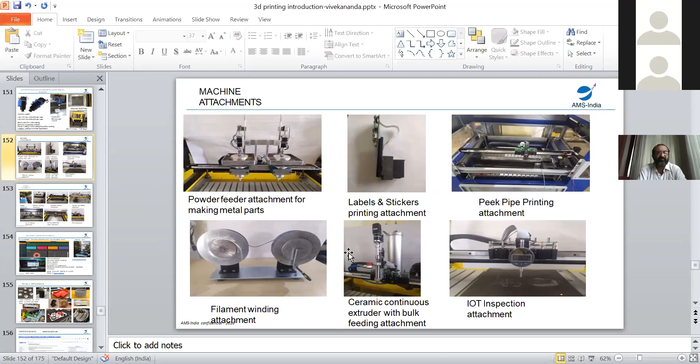These are all attachments, like conductive inks for printing labels and stickers. You have a circular attachment for printing, an IoT attachment, continuous feeders, baking filaments, bending attachments, turning and milling attachments. For education, we have pen attachments so students can learn G codes and M codes first, without breaking the machine or wasting material.

We have a 40-watt laser on the machine for cutting and different laser applications. We have an OPC UA attachment on the machine. OPC UA is a way to get data out: if somebody wants to do machine learning, the printing data is available remotely through the OPC UA server on the machine, so people can do more research in machine learning, artificial intelligence, and things like that.

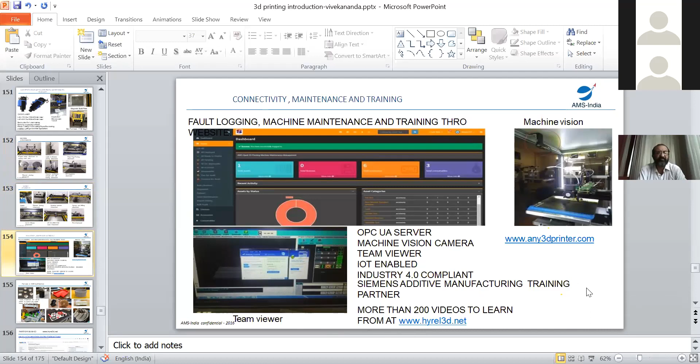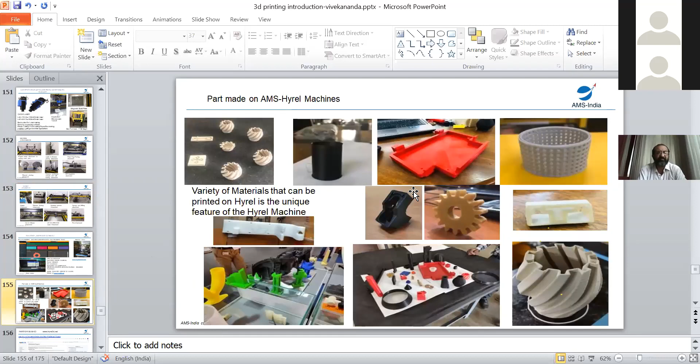So these are the different types of components which we have printed on the machine out here. Ceramics, PEEK and different types of materials are there.

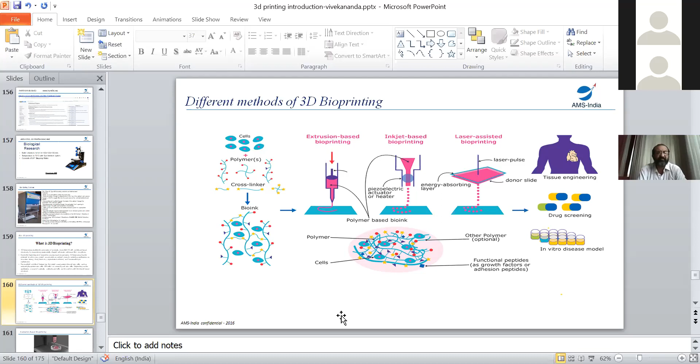We also have inkjet based bio printing and laser assisted bio printing. This is not something we are using at the moment. But for tissue engineering, we use extrusion based printing. That's nothing but you mix polymers, then you put the cross linkers and print the material by extrusion like this. And this is used for making what are called scaffolds. You print scaffolds. If you go to the website, more details are given, and you can see different types of material that are printed.

These are all bioinks. You can print human nasoseptal chondrocytes. You get this liquid actually; it's a standard available open source material. You can use it on our machine, print it in a well, and you can create all these different types of cells. This is used for research, and this is a new technology where a lot of development is going on.

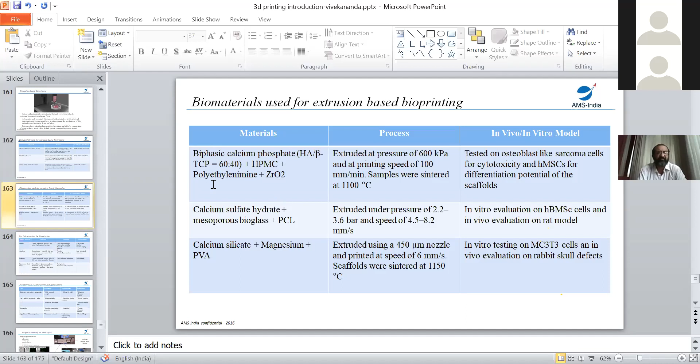What exactly is a scaffold? If you see what scaffold printing is, you can slice it in very thin layers. Just like how you build a scaffold around a house for painting purposes, you build a scaffold layer by layer by layer. It becomes like a sponge. Why do you have to do scaffold type printing? Once you print the scaffold, into this you can put the biogel directly. The biogel which goes into the scaffold, in the bioatmosphere, becomes very fertile for multiplication.

For example, let us assume you have a virus or bacteria. We take the blood of the patient and put it into a bioliquid, which is very fertile for multiplication. Within half an hour, it will multiply and it will tell you what it is. Before, we used to do what is called culture. Culture takes 3 days. So if you do a Widal test to find out if he has got typhoid, it takes 3 days to find out, and only then treatment starts. But here, in half an hour, you'll come to know.

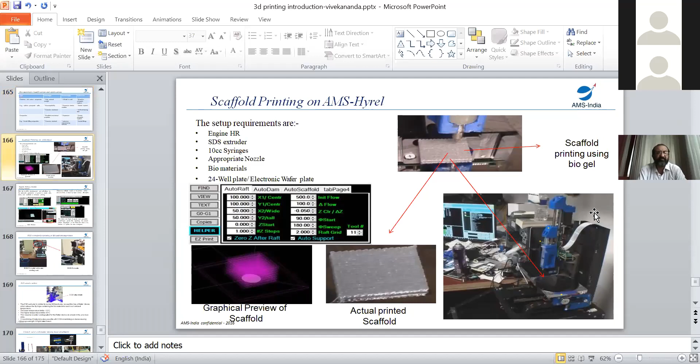And we are proud to say during the pandemic, we sold one bio printer to the Wuhan Institute of Virology also. This is the benefit. So people are using this to a very great extent, for scaffold printing, for research and for finding out things. And we have made the software on the machine to immediately create the scaffolds and do the 3D printing. This is the speciality, these are softwares which we have developed on the machine.

And in 3D printing, for plastics, you have to heat the bed; everything has to be heated and then it becomes liquid. Here, for biogels, you have to go to sub-zero temperature. You have to make the temperature below zero.

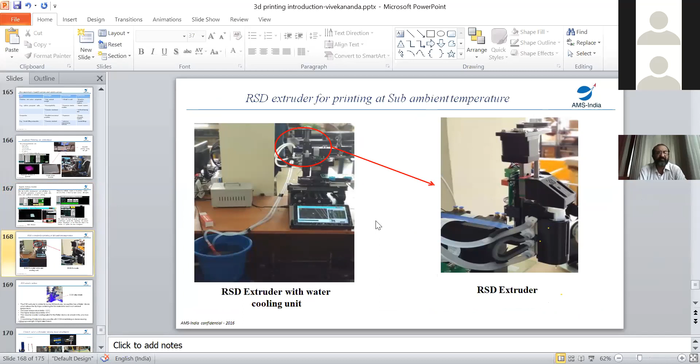Then only you should print in that area, sub-zero thing. So we have a refrigerated syringe device, and we have a refrigerated bed also made, which has up to 405 nanometers. We have an ultraviolet ray, which is going to be used even for killing all the bacteria and things like that. And so this is the attachment which goes along with the machine, by which we'll be able to use. We have a mixing head, and of course there are many attachments.

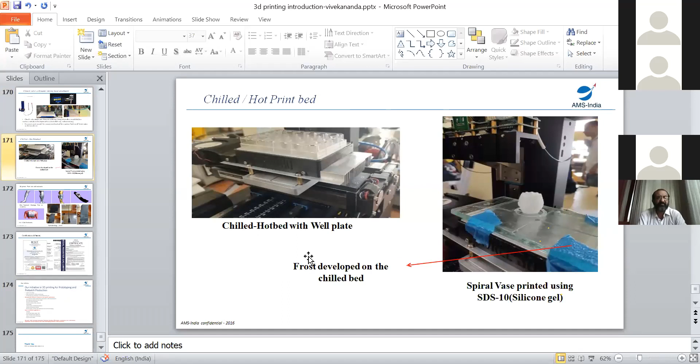You can see some of these components that we have printed out here, using the silicones, etc., can be printed, and many of the components are printed. Some of them are pretty useful. One ophthalmologist came up for some picture he wanted for checking, and one of the things, we scanned the body of a person just to make some cold treatment.

So with this thing, you can scan the body of a person, make a print exactly to the shape of his leg or hand or back, and then you can give hot or cold treatments for backaches, and you can also use it for treatments. You can see when a wound is there, when the plaster and the bandage is put, how much pain one would have undergone when the bandage is removed.

So with this, it is non-contact. There's no contact between the wound and the bandage itself. The new type of bandage mechanism that will come up. So this is what I just wanted to submit to you all, and tell different applications and things like that we have developed and been working on.